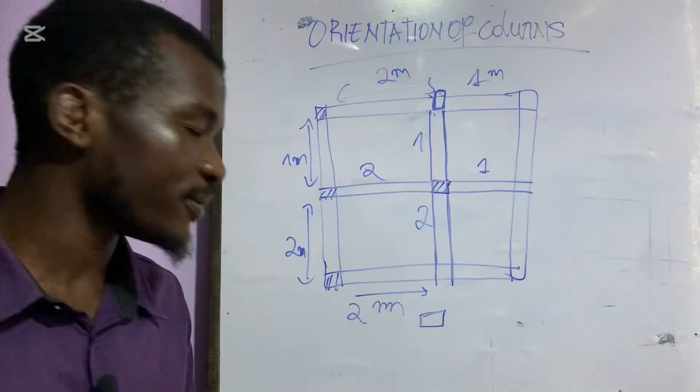So today we are going to talk about orientation of column. Whenever you are doing your architectural drawing, you have to know that there is a specific way to position your column, and you will understand it by listening to this video till the end.

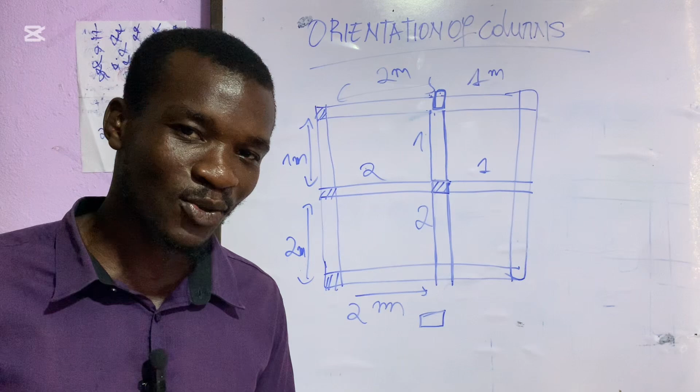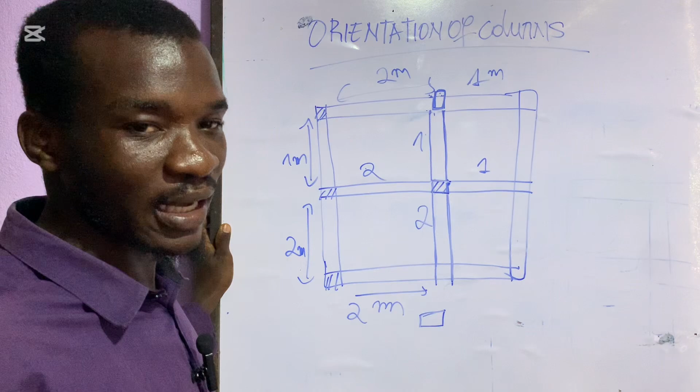So okay, let's fall into our topic of today: orientation of column. This is a sample of distribution plan. This is applicable exactly on rectangular column. So this is our distribution plan.

So how do you position your column? If you have this column, let's say 30 by 15 centimeter, how do you position it? Will you just come and draw your column at this junction like this, or will you instead draw it this way, sending the long side this way or sending the short side this way? Because representing it this way looks like the width of your column.

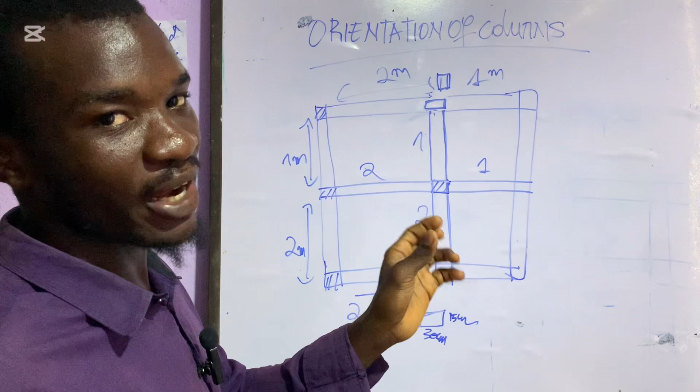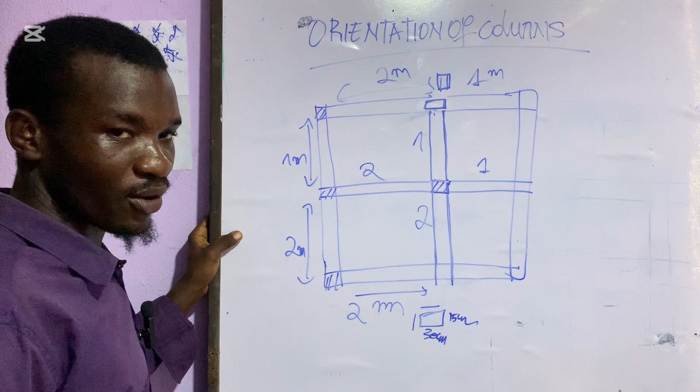It has a specific orientation. Will you position it according to the width of your column or according to the length of your column? That's the main question of this video.

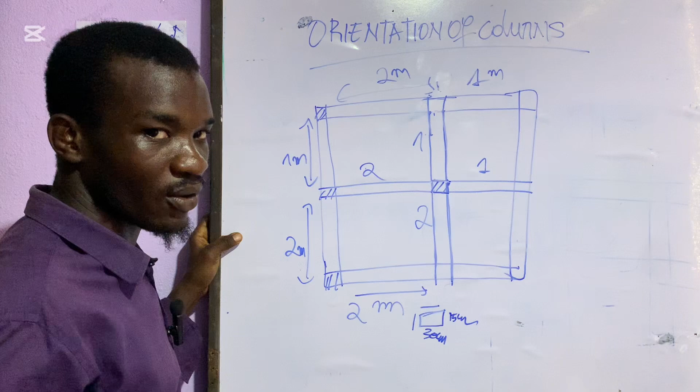So if you have this intersection where your column is supposed to stand, a rectangular column - I remind you, it's the case of rectangular column - how will you come to position a column here?

To know how to position, whether you come and position your column this way or this way, you have to first of all care about the span of your beam, if you can call them beam. You first of all have to care about them.

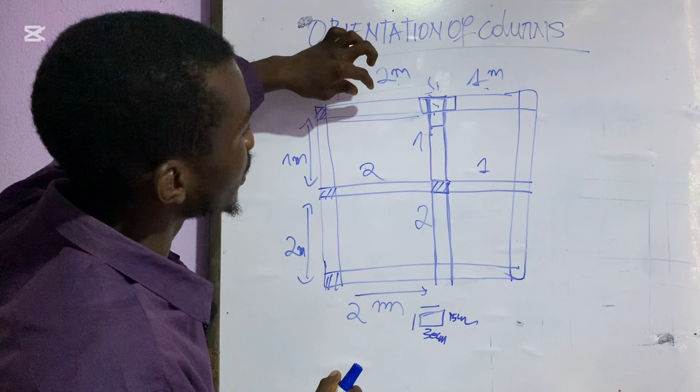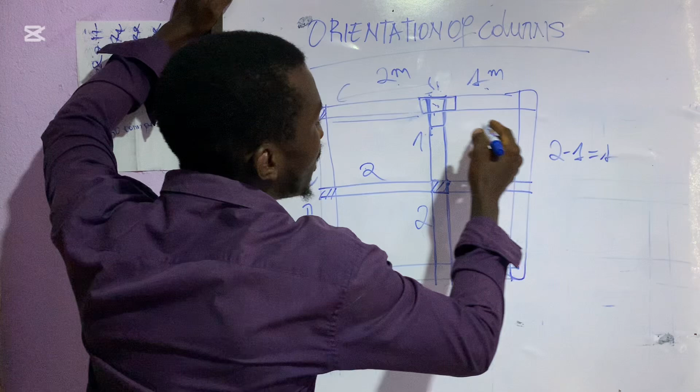That means what? For this very position, to know how to orientate your rectangular column here, you have to take this span, which is 2 meter, and this span here - you take this one minus this one, then compare to this other length. So exactly, you take 2 minus 1, it will give you 1 meter, then compare to this other span, which is also 1 meter.

As we have written there, it was the choice for our video. So you will see that this one is 1 meter. The subtraction of this span and this span gives you 1 meter, and this one compared to this one is equal. So here you can decide to position your rectangular column

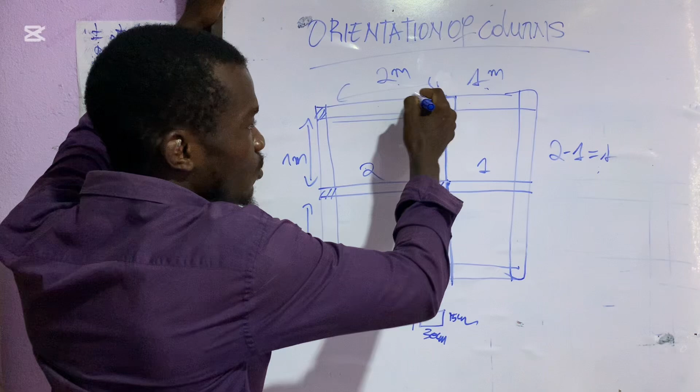as it please you. For this very case, either you place it this way, or you can place it looking downward like this, depending on you, because this length is the same as the difference of these two spans. Now what happens if you reach this situation here at this angle?

Now if you are to position your rectangular column here, you will see that this span here is 2 meter, whereas this one is 1 meter.

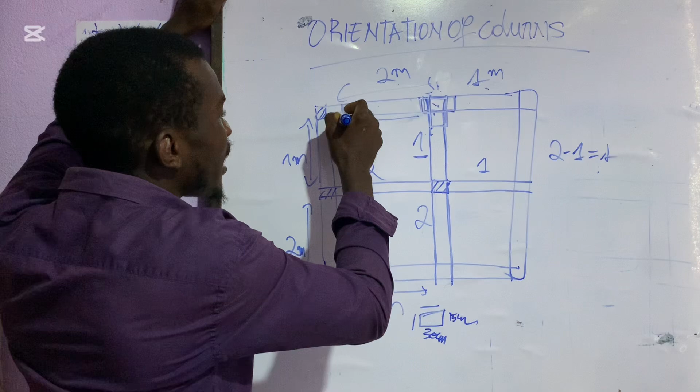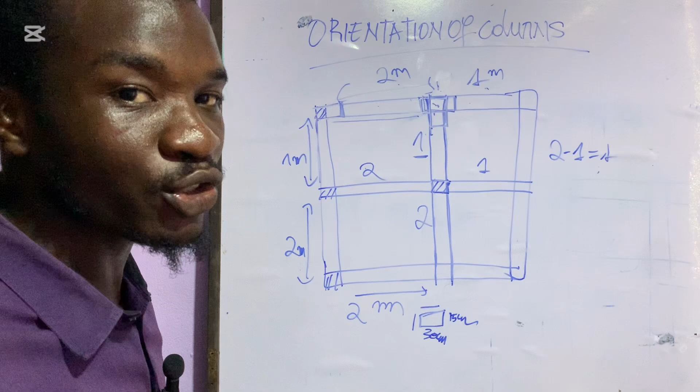So you have to orientate your column in such a way that the long side or the length of your column points towards the side having the longest span, to make sure that the column will be strong enough to carry the load sent by this long span. So now here you will not come and orientate your column like your rectangle column looking downward like this.

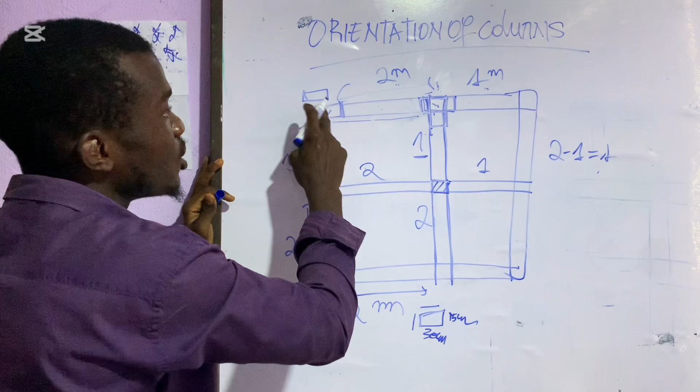No, you will not orientate it that way. You will orientate it like this, not looking downward here, because this is the long span actually. So you compare this span to this span, and you see that this one is short, 1 meter, this one is 2 meters. So you send the long side of your column looking that way, the long span of the section.

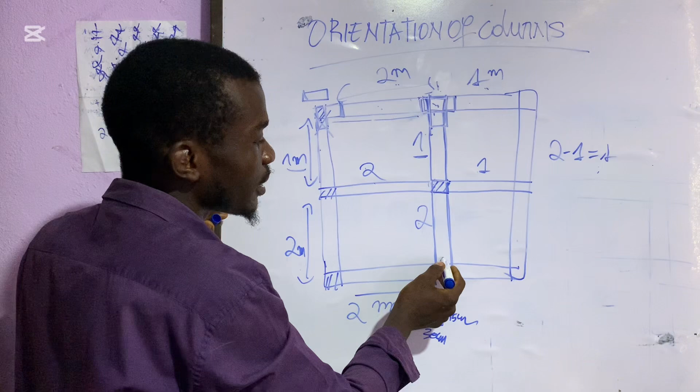Now if you reach this case of 4 intersections, right? You have 2 meter, you have 1 meter, you have 2 meter, you have 1 meter. The chance here is that the subtraction, the difference, because you will take the span along the y-axis and subtract them, and take the span along the x-axis and subtract them. That means you take 2 meters minus 1 meter, it gives you 1 meter. You take 2 meters along the y-axis minus 1 meter along the y-axis, it still gives you 1 meter.

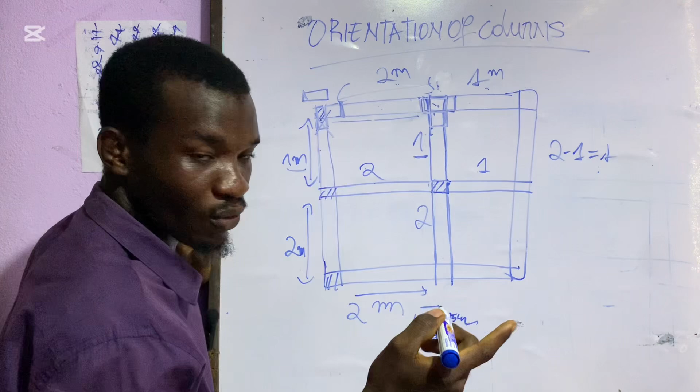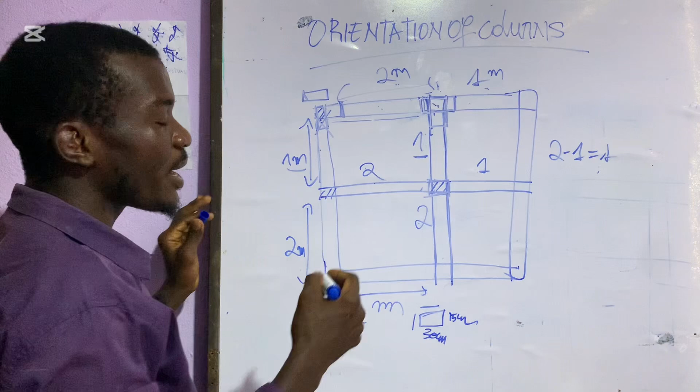So here you will not care about the orientation of your column. You can position it as you want, as it suits you in this kind of situation. But whenever you have a situation where there is a long span and a short span, always remember you have to orientate the long side of your column following the long span.

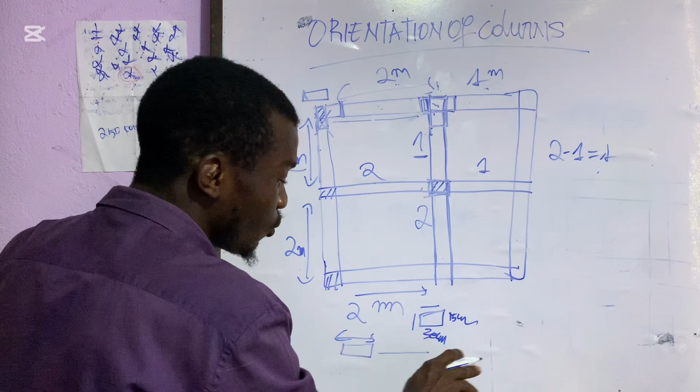This is what I call the long span of my column, so you orientate it following the long span of your beam. For example, in this case where this 2 meters is longer than this 1 meter, that's why we orientate our column looking in this very direction. I hope you understand the concept.

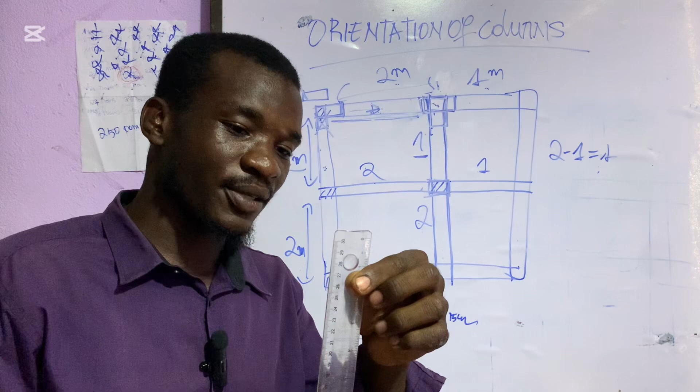It can be explained here. If you take this ruler, knowing that the beams are the ones transferring the load, if you try to bend this ruler like this, applying a load at the top, you see that it can easily bend in this kind of context.

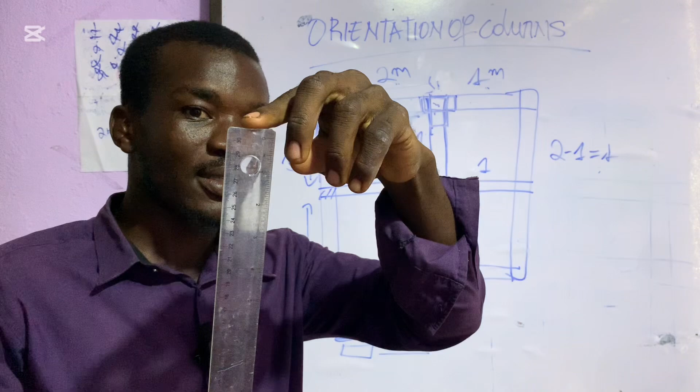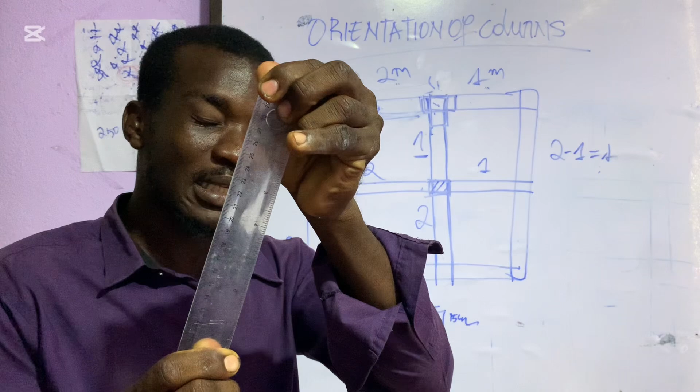But if now you take it this way, and try to bend it applying this very force, trying to bend it such a way that you bend it on this slim face of your ruler, it's actually very difficult. That's the same principle for the rectangular column.

Knowing that you orientate it here, looking at this slim face to carry the load on the long span, it adds more strength to the column.

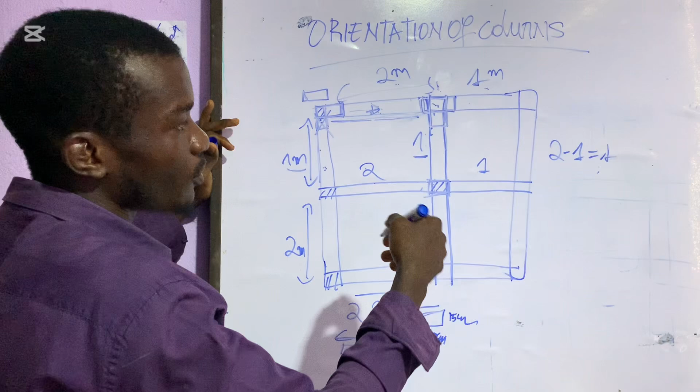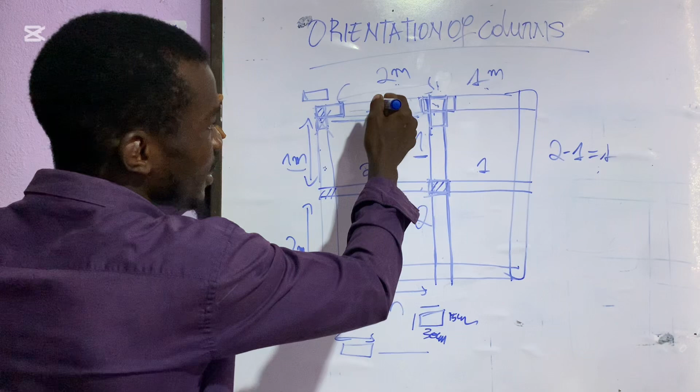And you know that in the repartition of load, the load in this room, for example, will be shared according to the short span. That means this is the beam that will be carrying the load, and if the load is being sent this way, this beam actually carries more load than this beam. That's why you have to orientate your rectangular column following this direction.

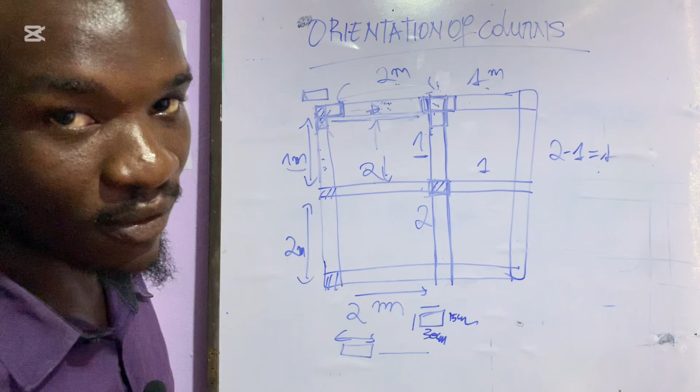I hope you have learned something in this new video. I hope this video will help you have a better understanding of how to orientate your column whenever you are making your architectural drawing.